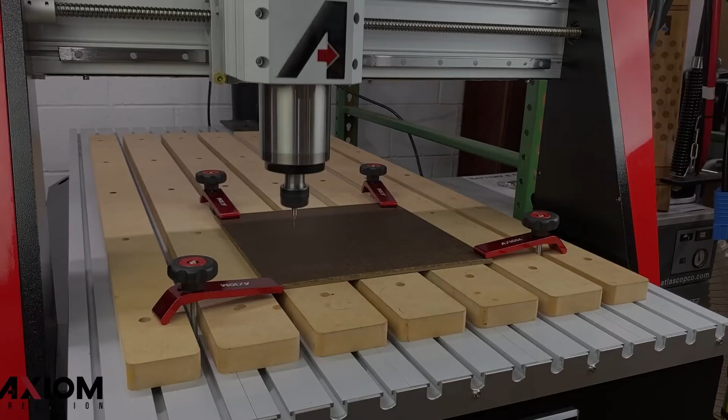And welcome to this collaborative project brought to you by Vectric and our friends over at Axiom Precision. Now, the barbecue season is well and truly underway, so we thought it would be a great idea to provide you with a free project that would make the perfect addition to any barbecue. So let's head straight into the software and we'll take a look at that file.

Okay, so we're going to use VCarve Pro version 11 for this project. Now, before we get started on our session, let's just take a look at a sketch that I've done so we can get a good idea of the parts that we need to create. And so here is a sketch where I thought I'd just show Austin how the part should come together. So let's just talk about this and some of the important things that we need to be aware of. So we have these ends, okay, so we've got one end here, we've got another end at the back, and these two parts basically help hold everything in place.

In terms of the measurements, we're going with 8 inches wide. We're also going to go with it being about 12 inches high, and then the length of it is going to be 15 inches. That way we get a lot of space for your napkins, cutlery, sauces, bottles, that sort of thing. So it's one of those bulky things that you could bring outside, hopefully contain everything in so you're not going in and out.

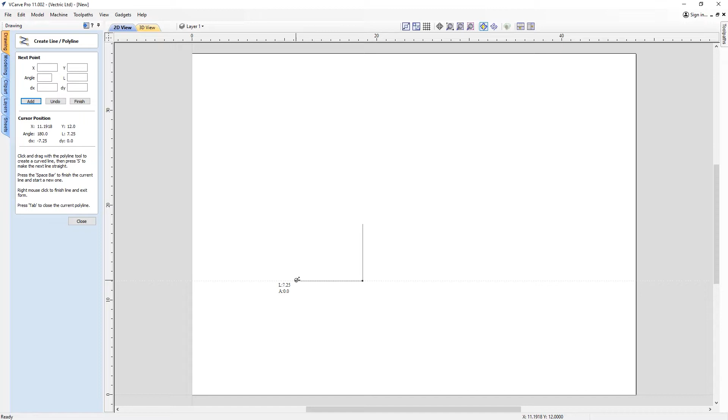So to start, let's use the polyline tool. So I'm just going to snap to the centre of our job. And we're just going to come down by 6 inches. So I'm making use of the smart snap in here just to tell me how long my line is. So we're going to go 8 wide. And we want to go back up to around 6.

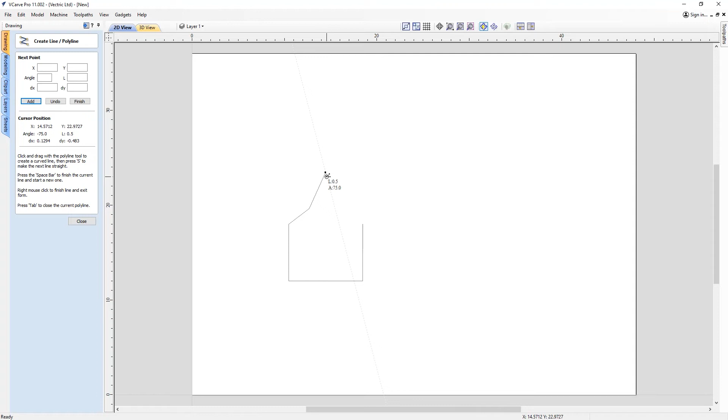And then we want to create this kind of curved shape. So we can do this, try and snap to the centre over here. So if we get the centre line there, and we can bring that up. Okay, so something like that. Maybe the best way to do this would be if we actually undid that. So in version 11 now, we can use the backspace key to undo any movements or positions we've already made.

So we're actually just going to take that straight up, about 7 inches high, and we'll just click that in place. Okay, and then we're just going to take that back over to the right as well, and then just snap that in place. And then we can right click, and now we can create the curvature that we need to create the shape. There's some nice smooth tops here for the actual end panel.

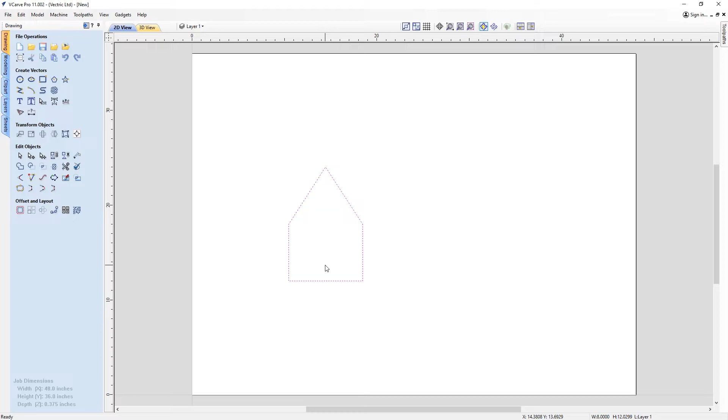So to do that, let's just go into node edit mode, and then we can just smooth this node here, and then we can take these nodes here, all the handles, and then I'm just going to press H on the keyboard to bring up that vertical line, and that way when I move one of these, they both move. So I'm just using the arrow keys to do this, and you can see that as I'm moving it, they're moving in parallel to each other as if we've got this mirror line.

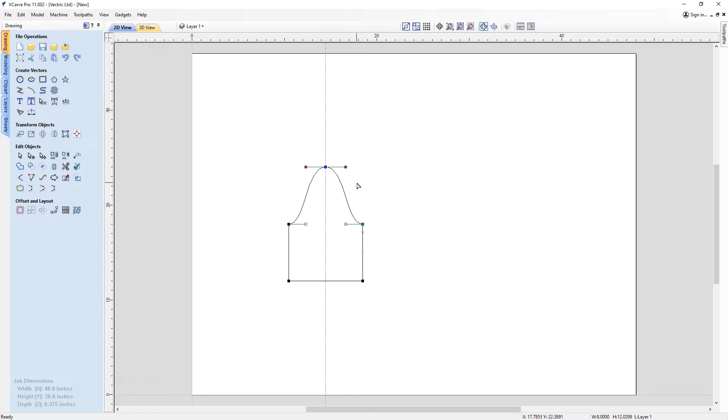Okay, so that's okay. So I want to just take these handles now, so I'm holding down shift to select them both, and I want to just make that a little bit wider, so it's something that looks like this. Then we can just click out, and that doesn't look too bad.

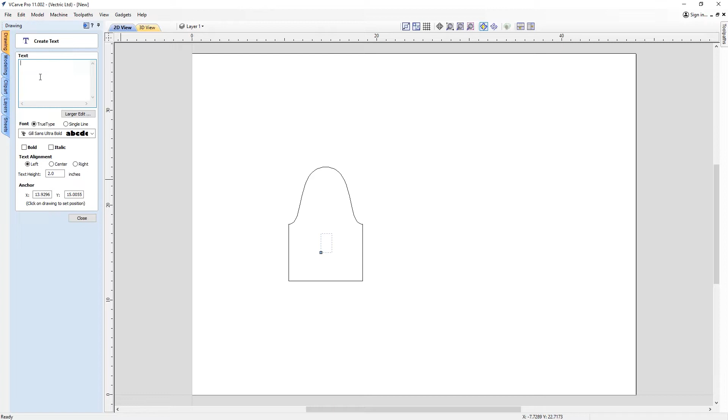Okay, so now we'll put in the barbecue text. So we're going to go into the draw text tool. Okay, so we're just going to position our text here. We're going to go with a font of Gill Sans Ultra Bold. We'll go with a text height of 2 inches, and we're just going to input here barbecue like so. And we can close out, and then we can just position that somewhere around the centre there, just to ensure that we're aligning that up centrally.

We can just align that to the centre like so, in which case we can then just shift that down to take a look at that. Okay, so that's not too bad. We'll just kind of leave that in a position something like that.

Okay, so now I want to give a little bit of detail here. So we're going to go for a decorative motif. Now I've created some vectors prior to this of a crown, so let's just bring those in. So we'll go to File, and we'll go to Import, and we'll import some vectors, and then in the project folder you've got the crown.dxf, and we can open that up.

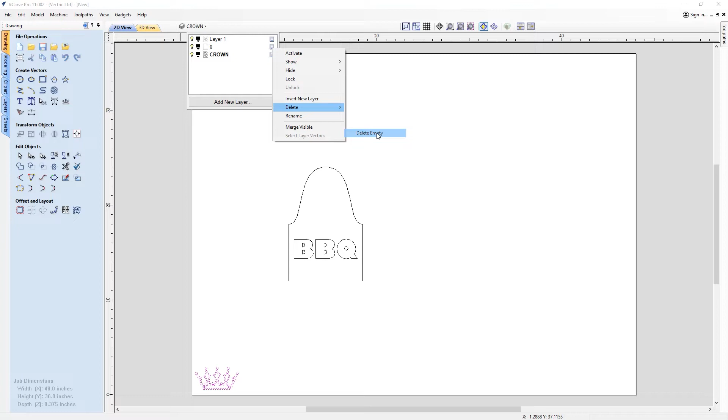Okay, so here is my crown. You can see it's on a layer called crown. You can also see that we've imported in an empty layer as well. So the real nice thing about the software now is, especially if you had multiple layers, we actually have the option here to delete empty layers, and it will just delete all of the empty layers in the list, which can be quite typical when working with imported vector details.

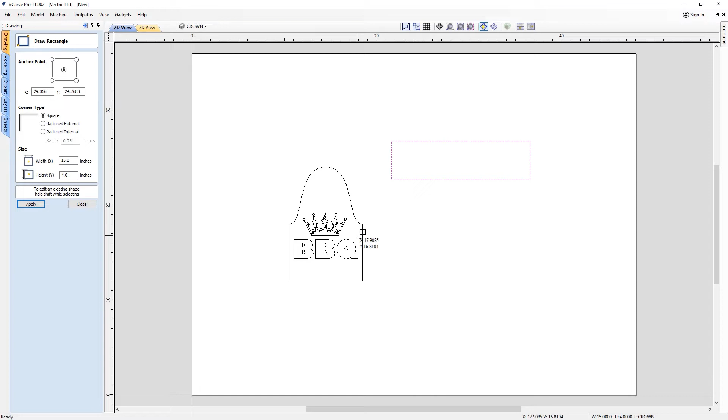So we're just going to position that somewhere like here. Okay, so that's not too bad. So we've got a decorative crown motif, so we've got the barbecue king. So next up, let's go ahead and create a side panel. So we're just going to use the draw rectangle tool in this case. We'll go the width of 15 and a height of 4, and then we'll just go ahead and create it by clicking in position here. Okay, so we're just going to move that somewhere over there.

Okay, so now what we can do is we can take advantage of this space. So this space is perfect to add in any form of personalization. So we could put in somebody's name, we could put in a slogan, you could put your own name in if you're doing it for yourself. You could put some more decoration in there, whatever it is. It's a nice big space for us to use, for us to V-carve. And as we are V-carving into plywood, we might get some of those layers come through just to add a little bit more decoration.

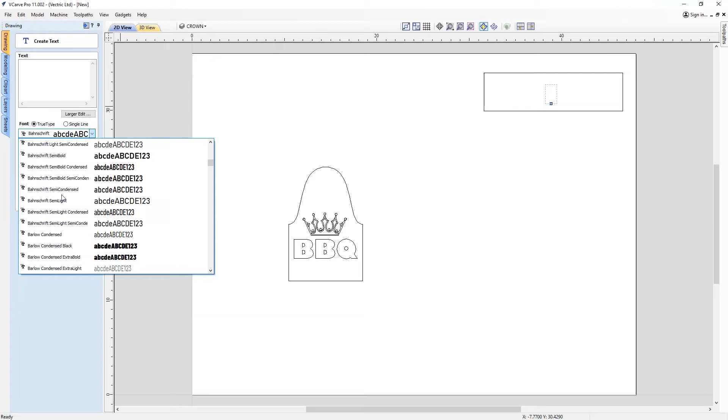So in this case, I'm actually going to put in a slogan. So we're going to go over to the draw text tool. Okay, so here I just want to position my text box. And then what we could do is we could just look at altering the font here. So we'll find the B, so we'll press B on the keyboard. And we're looking for Barlow. So Barlow Condensed is the font that I like. And then we can simply go in there and type in whatever the text is. So in this case, I'm going to go with King of the Grill.

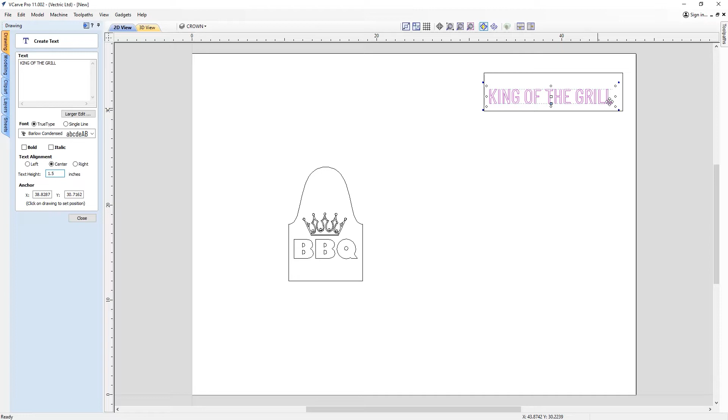Okay, perfect. And you'll notice here, the software's kindly telling me that this is the wrong spelling. And so we can use the spell checker, in which case we can locate the correct words there. And you can see it's done that, which is super handy. I might look at just reducing the font height here to 1.5 so it fits in our space there. Then we can simply close out. Just going to hold down Shift to select the rectangle, and then we'll just go ahead and align it to the center there. Okay, so we've got the King of the Grill in place.

Okay, so we're going to jump ahead now to this stage of the design. So everything else that has been created here has all been drawn up using the rectangle tool. And we're just going to talk about now how everything comes together, what the dimensions mean and what it means to you, before we start assigning our vectors to specific sheets according to the materials that we're going to cut them out of.

So pretty much all of the caddy parts that you can see here, bar the side panel, are going to be machined out of a material that is 3/8 of an inch thick. So we're going to be using the Baltic birch plywood to machine all of these parts. So when working with slot together projects, the thickness of the material is very crucial in terms of the slots that we use to slot parts into one another.

So let's just take a look at the side panel, for instance, or the end panel even. Okay, so here you can see I've got a rectangle here that is 1 inch wide by 3/8 of an inch high. So 3/8 of an inch is that material thickness. And so if you were to machine this, this is something that you would need to change yourself. And we'll talk about the different parts that you need to change later on in this video. But for now, if we're just assuming that this is the material we are using, we'll just go ahead and talk about the rest of the parts.

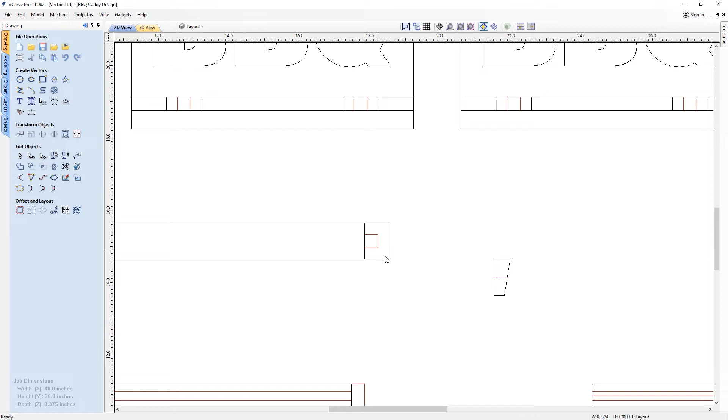And the idea is we're going to create a peg. So over here, I've got this vector, and all I did was I created a rectangle, but then this one node that we've got over here, I just extended that outwards. Then I ensured that the halfway point, which is here, is 3/8 wide, so that at the halfway point it should start to feel some tension as that pushes through the slot, where this portion of the wedge gets larger, and so that shouldn't really go through. So that's just going to lock that into place.

Okay, so looking at these two pieces that we've got here, this one represents the base, this one represents the upper portion that's going to line up in this level here, where we've got a hole cut out here and we've got one here, and this is where we can slot in our bottles, sauces, napkins, that sort of thing, and hopefully it just keeps it all stood upright. So how does this work then? So if we just zoom in a little, we've got this base shape, so the overall base itself is going to be 15 by 8, so that's just a rectangle that I've drawn out.

And then we're going to have the side panel, so this rectangle here represents the side panel, which is this one here or this one here. And the idea is we're going to take this shape, but this shape is going to be extended into this area here, so it slots through. So imagine all the vectors that we can see here as if we're looking down on the piece. It's like a bird's eye point of view. Okay, so we've got the end panels here and here. And then we've got this piece that comes out. It's going to slot through a hole that we're going to have, which is represented by these vectors here and here. Well, these ones on the top.

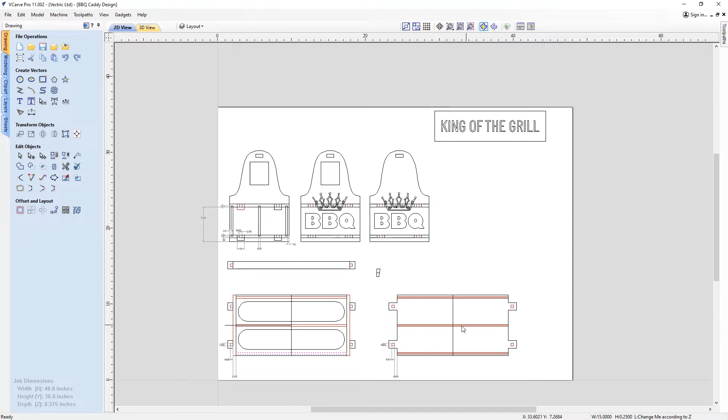So we're going to be looking at using different material here for the side panel. So the side panel is the king of the grill, so we're going to have 2 of those. We're also going to have a plain one that's going to sit in the center reservation here, and that's just going to help us keep compartments separate, so that it doesn't end up a bit of a mess inside of the caddy. Okay, so we're accommodating for that material thickness here, so that is 1/4 of an inch there. And then if we take a look over here, you'll see I've got a side-on view of what we'd expect to see here.

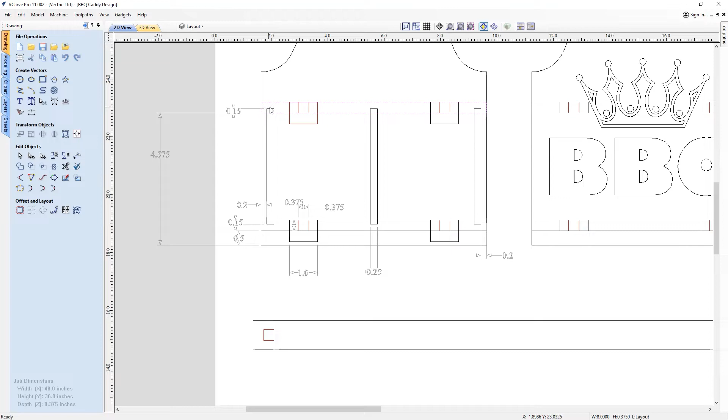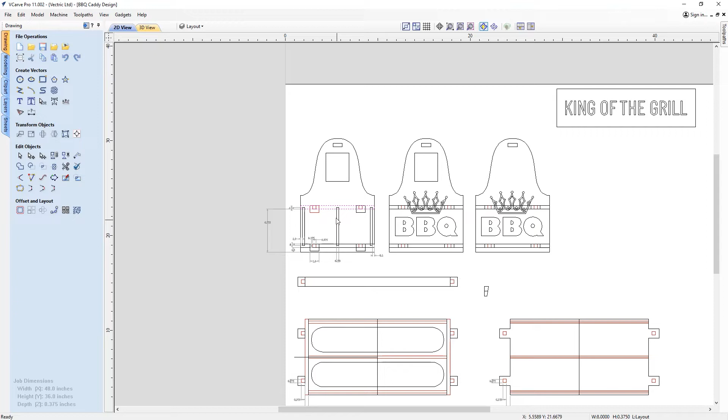So we've got these panels, okay, so they are essentially going to slot into the actual top and the bottom base of the parts only by 0.15. So we're going to be looking at creating a pocket of 0.15 to create these tracks, so then this piece can just slot in nice and easy there. So that's pretty much it.

So in terms of what you need to change, what we'll do is we'll organise all of the vectors into a different sheet, so that you know exactly which vectors you need to alter the layout with. So to do that, we're going to go over to our sheets. Okay, so it's the tab here under the layers tab. At the moment we currently only have one sheet, and I've named this one the layout sheet. As I've opened up the file, I've already named that. So you can alter the name by right clicking and using the rename option to give that a name.

And to add in a new sheet, we can use the add new option. Okay, and then we're going to call this one layout to edit. And we'll just ensure that everything is on there that you know that you need to change according to your material thickness. So we've created that, and you may have noticed that this sheet has been added, and if we just zoom out, you can see it's been added here. And so then we can start copying some of our design over to this sheet over here.

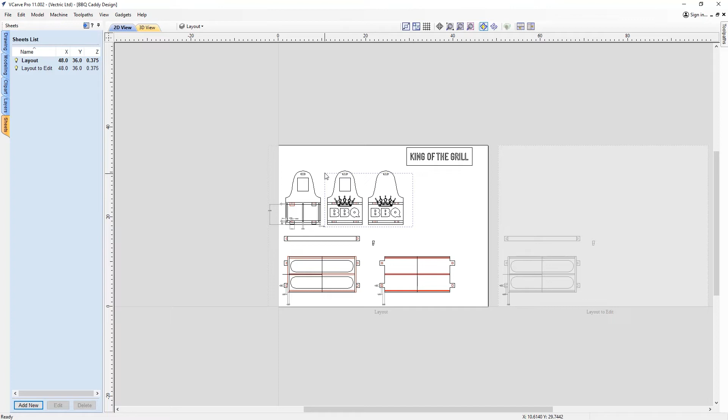So to do that, we're just going to take this one, for example. We're going to right click, and we're going to say copy to sheet, layout to edit. You can see it's copied that over there. We're also going to take the handle and the peg, like so, right click, and then say copy to sheet, layout to edit. And we're going to take these two like so. And actually what we could do is just take one of those as they're identical, and we can then just simply right click it and say copy to sheet, layout to edit, like so.

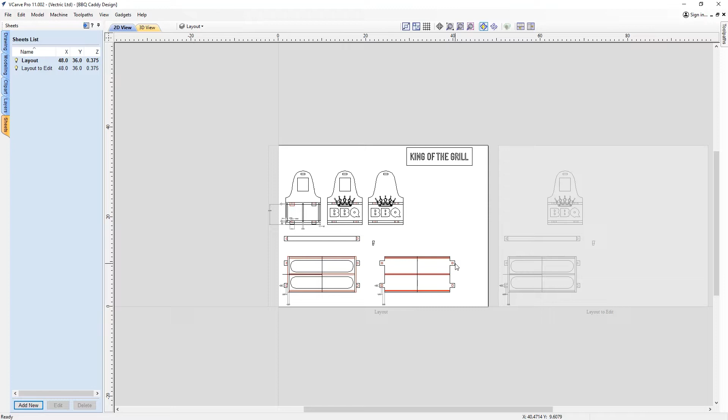Okay, so we can then go over to the layout to edit. To do that, we can double click on the actual sheet itself if we wanted to, and that'll take us to that sheet. Okay, so here we just need to make a few edits. We don't need this vector anymore, so we could just go ahead and delete that. We can also delete this one, and that one. We can delete this one, that one, and this one. And then we could delete this part of the design, that part of the design as well. And then on the bottom here, we can keep that as it is.

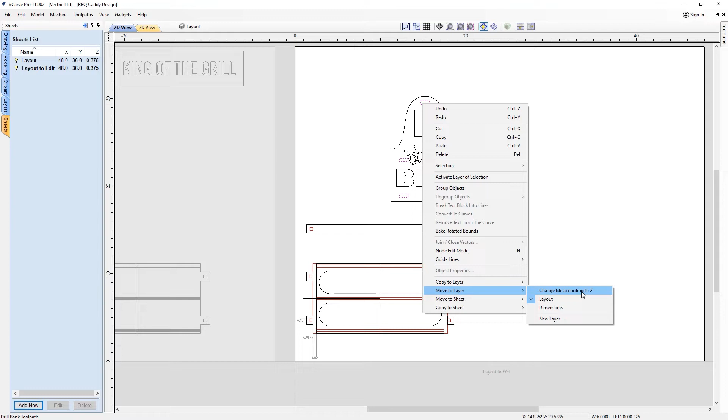And then we're just going to take these vectors here, like so. We're going to right click, and we're going to say move to layer. And we're going to move this one to a layer called change me according to Z. Okay, so this is where you know what you need to change. So everything that is in red is what you need to change according to your material thickness. In which case we can then go ahead and double up what we need.

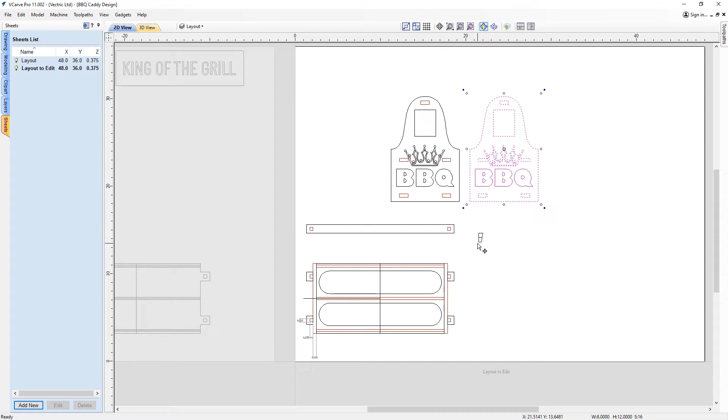So we need another one of these, so we'll just press Control and Alt with that selected, and then we could just go in, delete that one, and then we just need 10 lots of those. So we can go and just create some copies there, like so. So we've got 4, and then here we have 8, and then we could just go ahead and put in 10. So here we have the 10 pegs that we need as well.

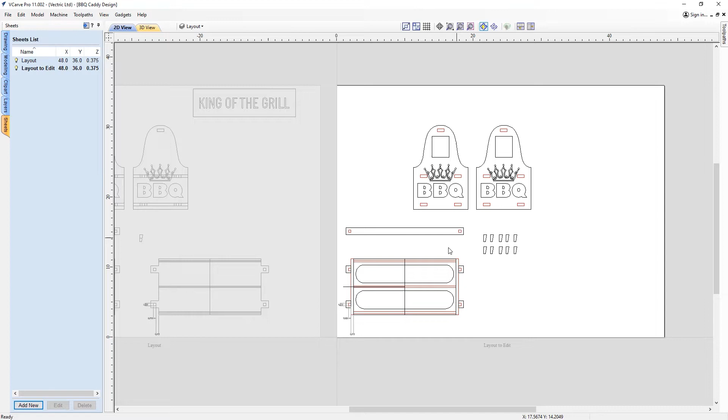So what you need to do is change all of the areas in red according to your material thickness for the overall caddy. You'll notice that I've only copied over one of these, and that's purely because you may as well make edits to this one and then copy that over and then just delete these out, as you do not need them for the bottom piece. Okay, so just going over this panel.

Okay, so what you need to do is you want to make sure your material thickness accommodates the side or the end pieces. So this barbecue piece, that's going to go in there, so you want to make sure that you account for that. Then obviously your peg holes as well, and then the tracks for the grill, or the side panels that we've got there. And that's pretty much it.

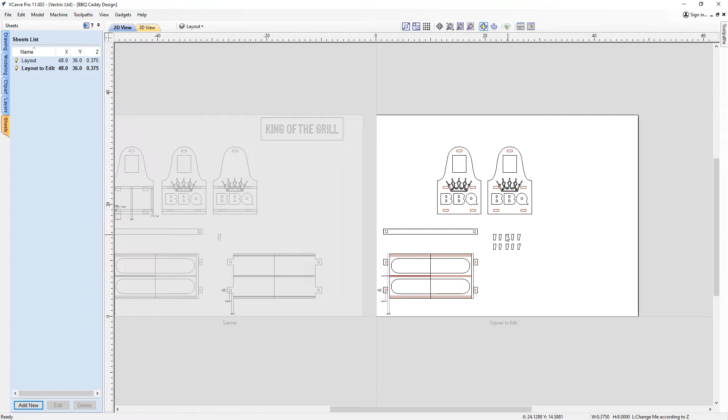You also want to check your pegs as well. So if your material thickness is larger or smaller than the example that we're using, you probably want to alter the peg width as well. So you can just do that by using node edit mode to just decrease or increase the pegs. Okay then, so we'll just press F just to fit that to our screen.

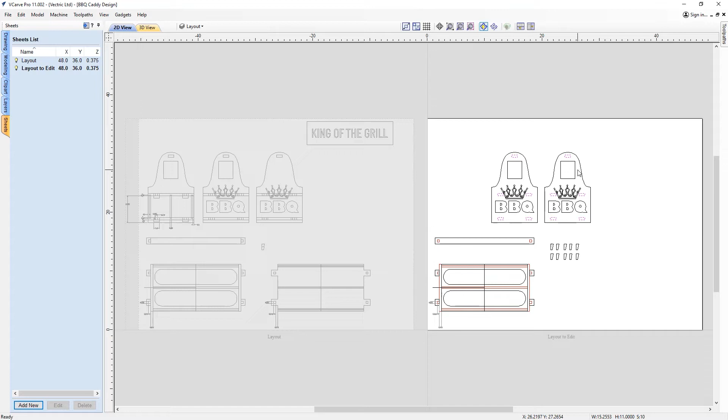So let's say, for instance, the material thickness that you are working with for the overall caddy was 0.3. We've got a nice quick way of changing this. So let's just take all of these slots, for example. So we could take those like so, and then we could go into the drawing tab and we can use the set selected object size tool. Okay, and so here we have the option to scale items individually, and when we click on that, what it does is it scales them on an individual basis as opposed to as a selection, which is perfect for slot together projects just like this one.

So for example, we could say, well, actually we want the width still to remain at 1 inch, so we're going to uncheck link XY, but then I could say, well, actually my material thickness is 0.3, and so we could put 0.3 in there. And then if we go ahead and press apply, you'll see that it changes those and it adjusts those for you, which is perfect. Nice, super quick way of doing that. Alternatively, you can do that by percentage as well. Okay, so we're just going to undo that. So just press undo, take it back to 3/8 of an inch, and then we'll just close out there.

Okay, so now that we know all of the elements that we need to change to work with our material thickness, and we've got pretty much everything drawn out, we can now start thinking about the materials that we're going to use to cut various elements of the caddy itself. So the barbecue text that we've got here, we're actually going to cut that out of a sheet of masonite. So we're going to look at creating a new sheet again.

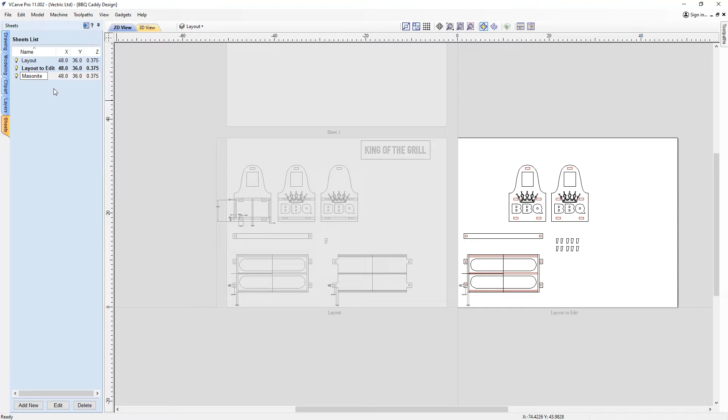So we're going to go over to our Sheets tab here. We're going to use this Add New option. You can see automatically it's created that sheet based on the last set of settings. Okay, so we're just going to call this one Masonite. And then we can come out here. So we can take the masonite and we can use the edit option here, and this is where we can edit the actual sheet size for this particular sheet alone. So here the masonite that we're using is actually 12 inches by 12 inches by 1/8 of an inch, so we can put those values in there.

And then we can specify the Z0 position, the XY datum position according to this particular sheet, in which case I still want the Z0 off the material surface, and I still want the XY 0 position in the lower left hand corner. So you could go ahead and press OK, and you'll see it's now updated that. It's also updated the job size here, and if we zoom out, you can see that compared to the other sheets that we've got in there.

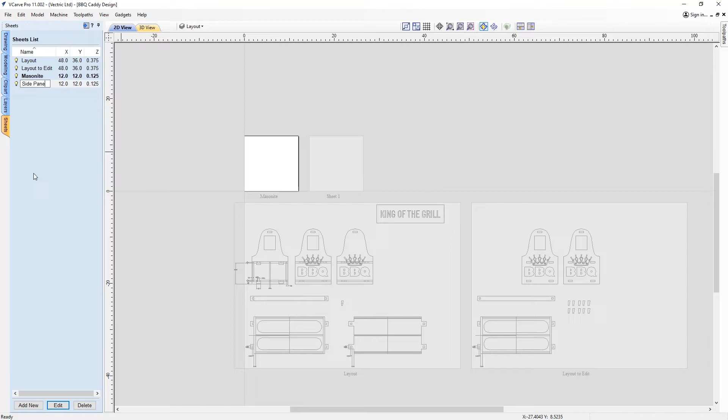Now whilst we're in our sheets list, we may as well add in another sheet. So we're going to add new, and here we're going to call this one side panels, and again, if we just double click on that, that highlights that, but we can go onto the edit option here, and then we can give that the actual dimension. So in this case we are using Baltic birch plywood again, however we're just working with a different material thickness, and so the width is 20, height is 20, except the material thickness this time is actually 1/4 of an inch, and again we'll just go with the same settings here, and we could go ahead and press OK, and again if we zoom out we can see what we've got there.

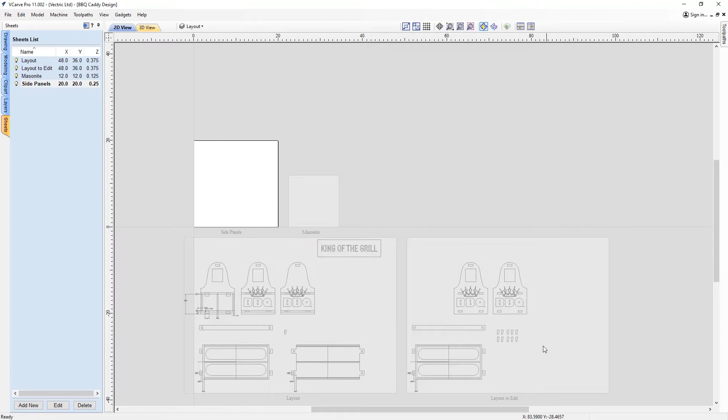Okay, so we've got those two set up already, so I'm happy with that. So then what we can do is we can just double click on our layout to edit. Let's just take this, and we'll take this one as well. We're going to say copy to sheet. We're going to send that to the masonite sheet, and then if we take a look, we can see what it does. So it positions it according to where the original vectors were relative to its 0 position, okay, which is why it's kind of extended out this boundary here.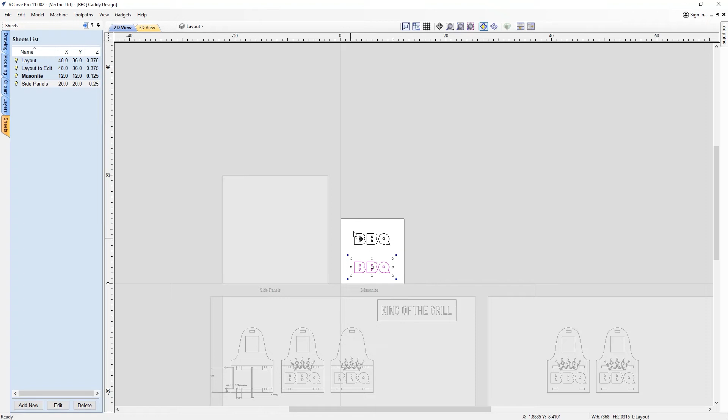So we actually need to put that on our sheet. So if we double click on the masonite, we can then take that, we can move that into position, take this one, move this one into position, and you'll see that boundary is now gone because we're in the confinements of our actual sheet size that we've specified here. And so here we're pretty much ready for us to create an inlay toolpath with the masonite for the barbecue text. Okay, so let's have a look at the side panel.

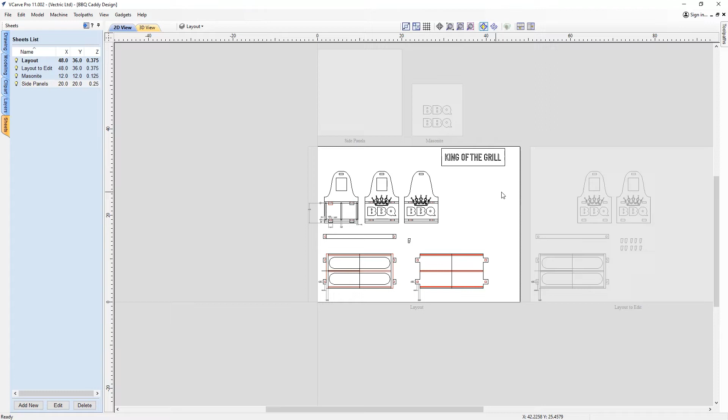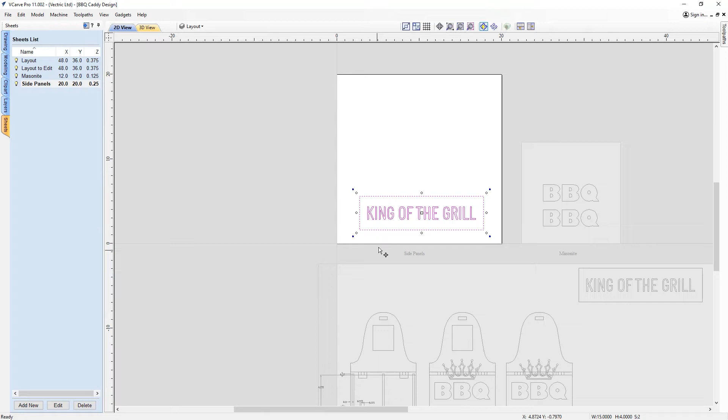So if we just jump back into the layout, and then if we just take that, I'm going to right click, I'm going to say copy to sheet, side panels, and again you can see it's positioned that up there, again relative to exactly where it was previously. So we're just going to take that and we're just going to move that over into position like so, something like that. And then actually I might want to consider looking at spacing out the text a little bit more.

So what we could do is we could take the text and we could go over into the drawing tab where we could look at kerning it or editing the text spacing. And so if we click on that, that enables us to alter the spacing between individual characters. And so we can edit the spacing of the characters on an individual basis between each one of those letters just by clicking, or we could look at editing the spacing of the characters for the actual whole line, which is a much quicker way of doing this. And this is an improvement that we've had for version 11.

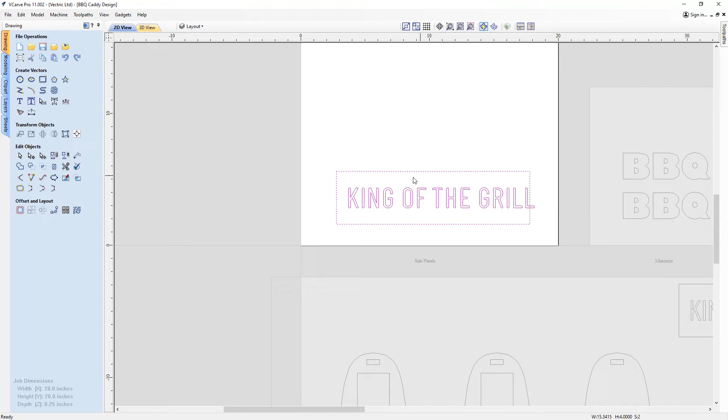And so to do that, we simply press the Alt key followed by the Shift key just to space them outwards, and we can just simply click 1 and 2. I think that's enough space in there, so then we can just come out like so. We're using the normal selection mode. We can take our text, shift and select our side panel, and then we'll just align it to the center there. And so here we have King of the Grill, in which case we just need a copy of that.

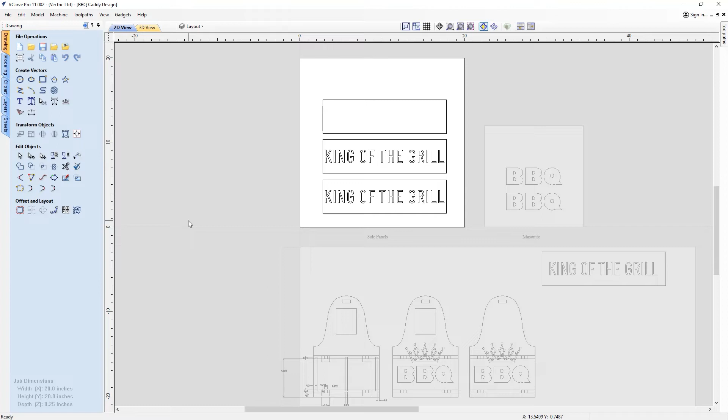So we've got one side panel for one side and one for another, and then we need a third, which is just a plain one that's going to be the divider that's going to sit in the middle of our caddy, which is going to go along these tracks in the middle here. Okay, so moving on again with the design, you can see that I've created a sheet here for the Baltic plywood. And so if we double click on that, we can see what that looks like.

And this is the kind of final design here based on the thickness of our material and all of the parts that we need. And you'll notice that the slots all have these dog bone fillets on. Okay, so that's just to ensure that the round tool can actually get in to those corners. So if you've never used the fillet tool before, that's just accessed here.

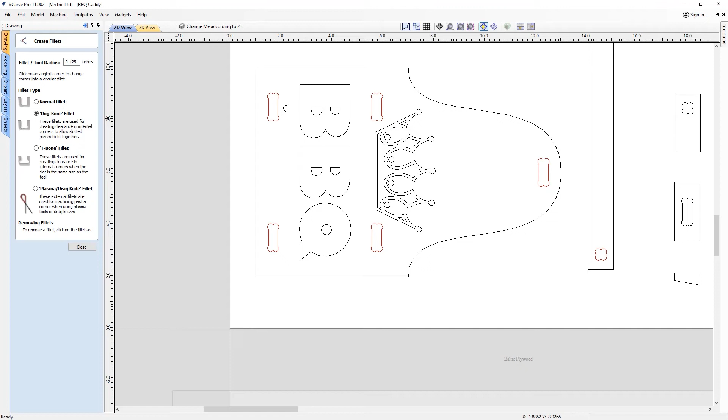So use the fillet tool and then select the radius of the tool that you plan to use, in which case we could say if we're using a 1/4 inch tool to cut something out, we'd put in the radius of 1/8 of an inch. We'd select the dog bone fillet, and then you can simply just click in place on the corners and it will create those fillets for you. So I've left those in red as well, so that you know that you need to alter the fillets there according to your material thickness as well, just as another reminder.

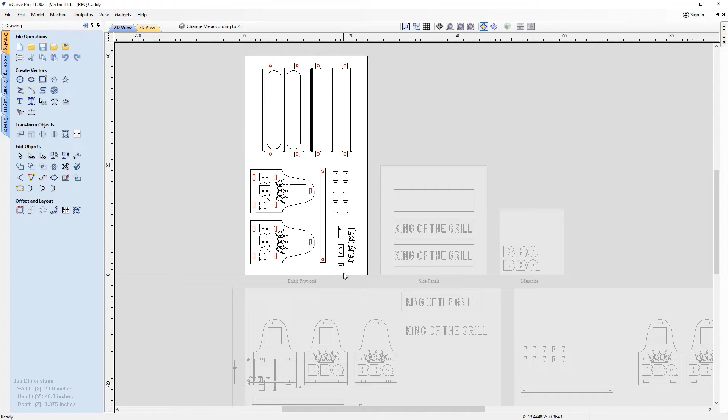Now, if you've watched any of my projects before where we talk about slot together parts, you'll know that I'm an advocate for creating test cuts beforehand. So I've created a little test area here to cut the key elements of the part. So you've got the main slot, which is these slots here. You've got the actual handle or the parts that are going to be coming through the slots to slot into, along with the actual square.

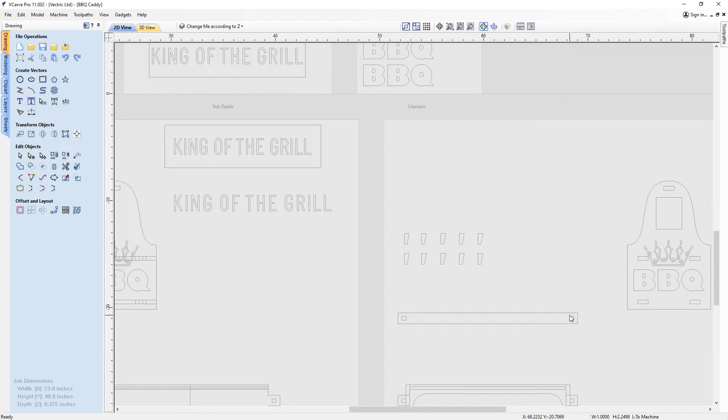So remember these squares here. Those are for your peg holes and a peg as well. So we can then test that this part slots into here and then that peg slots into the actual square as well to kind of lock that in place. So it's always good practice to do that. And once you've done your test, then you can move on to the rest of the elements to cut out.

So at this stage, we're pretty much ready to go and think about our toolpaths. So we've got 3 sheets to machine. We've got the plywood, the side panels, and we've got the masonite.

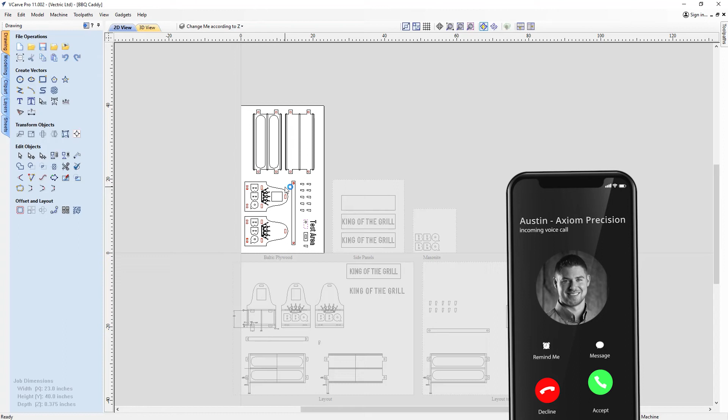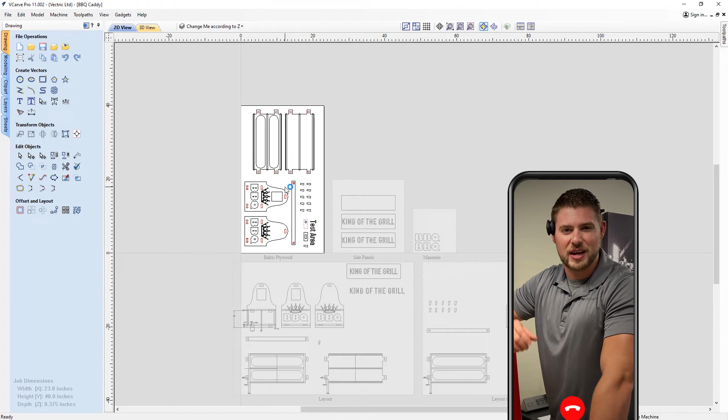Hi Becky, quick tech tip for you. We found that anytime you're working with inlays, it's always a good idea to start by cutting your male portion first. This way, you can cut your female piece out and leave it mounted to the machine. Come back and do a test fit of your pieces. And if you find you need to make any adjustments to the female piece, you can simply go back to the software and make those adjustments. This just helps us ensure we have a nice snug fit of our inlays. Excellent top tip there from Austin.

So let's double click on the masonite and then we can switch over to the toolpaths tab. I've already put the toolpaths in here, so we're just going to quickly go over them. So here we've got the male inlay. You can see that we are on the masonite sheet, so that's pretty handy for us to know about as well. And as always, you should check over your material setup, ensuring that the settings are safe and appropriate for your particular use. In which case, we've got a thickness of 1/8 of an inch. We're setting the XY in the lower left, the Z0 on the material surface, and then we've got various clearance and plunge settings that are safe for our setup. So here we could just go ahead and press cancel.

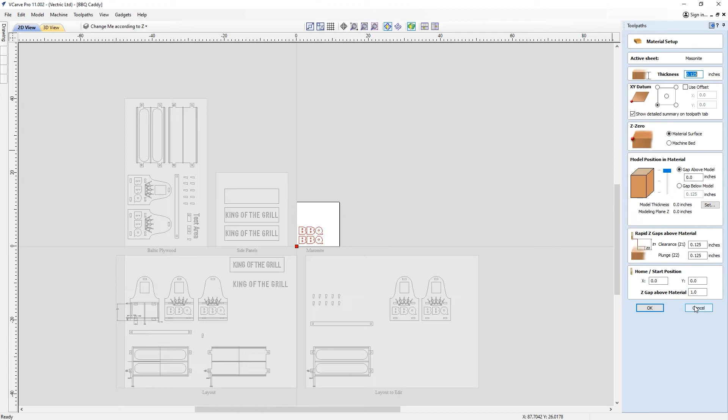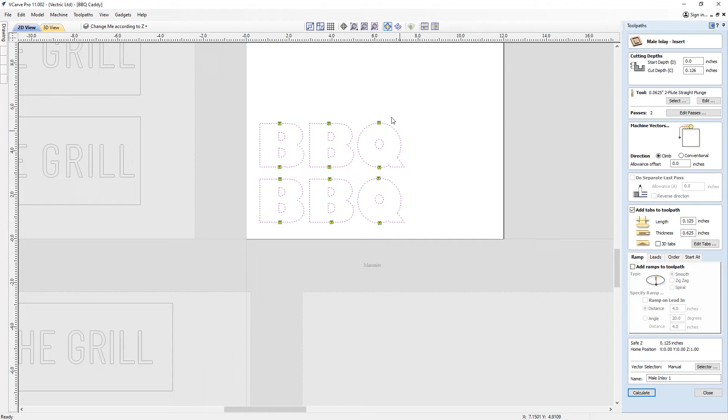So if we double click on the male inlay, let's just zoom in over here. We can take a look at what we've got. So we're doing the male inlay, the insert part here. For the cut depth, we're just going to cut a little bit extra past our material just to ensure that we cut all the way through here. The tool that we are using is a 1/16 inch 2-flute straight plunge bit, and that's going to cut that in two passes. We're also adding tabs to this just to hold everything in place, and then you can simply go ahead and press calculate, but we've already calculated that, so we're just going to go ahead and preview it.

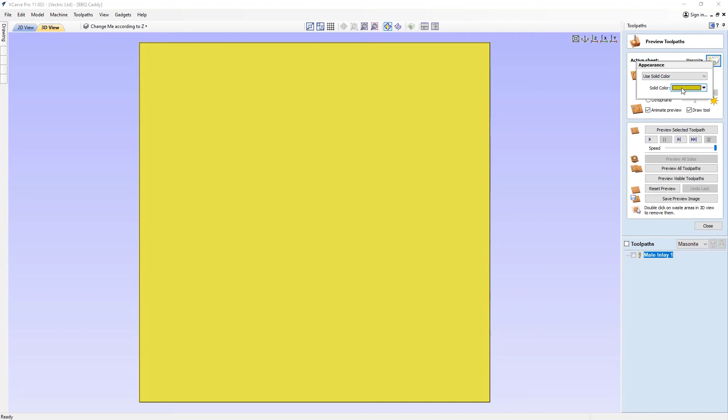So let's just go ahead and pick a material that better represents our masonite. So we could go in here and we could look at using a different material. Now in this case, we're going to just go and pick a solid colour here. So we're going to say use solid colour, and we're just going to go with black. So it's quite a dark colour there. So here we could go ahead and preview that, and that's what that part is going to look like. So we can simply close out there, and that is the masonite done. We'd then go ahead and save our toolpaths and send that over to our machine.

So next up, if we just go to our 2D view, we can now think about the side panels. So let's just double click on the side panels there. You can see as well, we are on the side panels. I can also switch between sheets by using this drop down list. So we've got two toolpaths here. We've got a V-carve toolpath, so we're just V-carving the text there, and the tool we're using there is a 90-degree V-bit, and then we're just using a profile toolpath to actually cut out our parts.

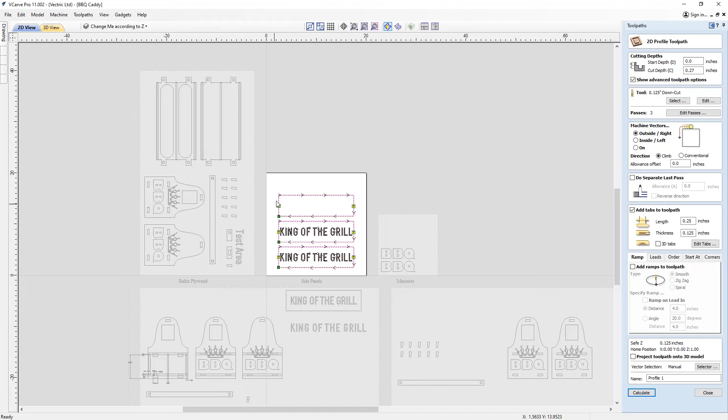And so for the profile toolpath, if we just jump in, we can see we're just cutting down a little bit further, and we're using an 1/8 inch down cut tool where we're going to machine on the outside. We're also going to look at adding in tabs to hold that part in place. And so again, let's go ahead and preview this.

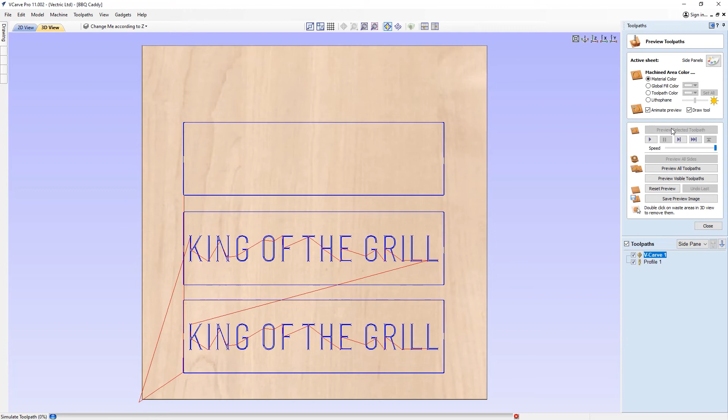Okay, so again, let's just go in here. We're just going to set this to Canadian maple. Okay, so that kind of looks like the plywood that we're using. And then we'll just select the V-carve toolpath first. That's looking good. And then the profile toolpath, we'll preview that, and we can see those there. So it's all good, looks great in the preview. And again, we could simply go ahead and just save those toolpaths out.

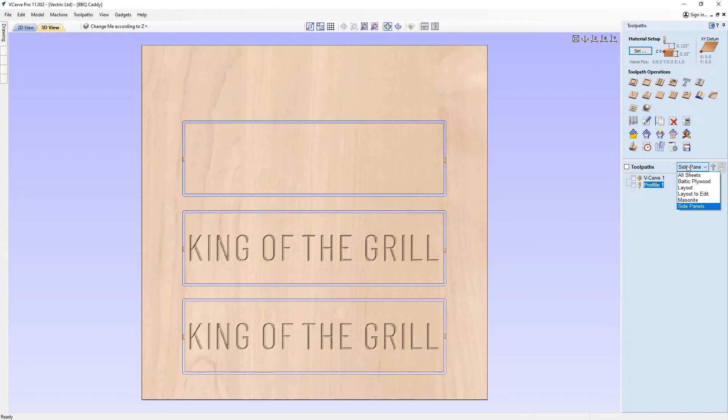Okay, so next up, let's just switch over to our Baltic plywood. Here we can see we've got lots of different toolpaths there. So if we go over to our 2D view, we can see the vectors that we've got here. So let's just run through the toolpath. Here we've got a pocket test with an allowance of -0.02. So let's just double click on that. So we're looking at the test area here.

So you should do your test cuts first just to ensure that the settings that you use for your slots are correct, or they just fit nicely, rather than you just going into the deep end and cutting everything as you think it should be. At least once you've fine-tuned the settings for your test pieces, you know then that everything's going to fit in nicely. So what we're talking about here is this pocket allowance.

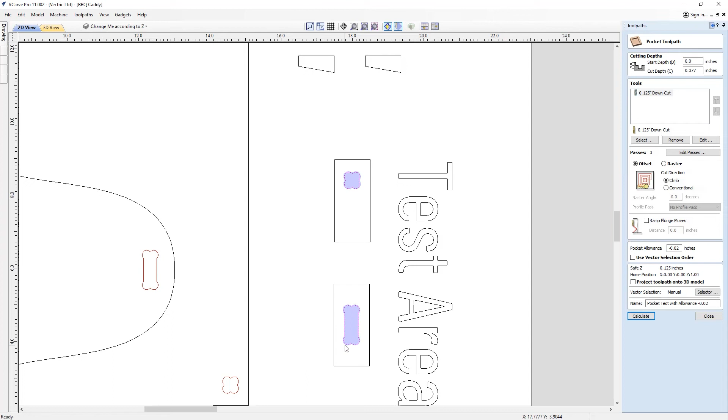So we're just doing a pocket cut here, so we're just cutting through the holes here. We're cutting all the way through the material using an 1/8 inch down cut tool, and we're going with a pocket allowance of -0.02, so it's going to overcut by that amount. So if we just switch to the solid view, you can see how much that is overcutting by, judging by that purple area here. It's going past that vector.

Okay, so if we didn't apply a negative allowance here, then we might find that when the two parts come together, so when this part slots into this slot here, it could be that tight that it actually doesn't even fit together. So that's why we use a negative value here to overcut there. And so that's really the value that we're wanting to test. From past experience, this value's always worked for me.

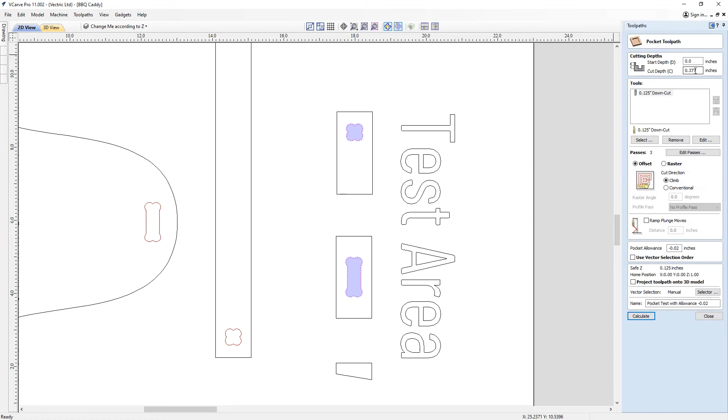However, it all does depend on the material you're using and the tools that you're using as well. So it's always good just to do test cuts and then alter or fine tune this value to a suitable fitness that you find when you cut that out. Okay, so it's just as simple as that. We're cutting down 0.377 with an allowance there. So let's go ahead and preview that.

Okay, so again, let's just change this. We'll just go to the Canadian maple. That's probably the closest that looks like that. So there we can go ahead and preview that. Okay, so that's what that will look like. And then we just go ahead and tile our windows, and we just zoom in over here.

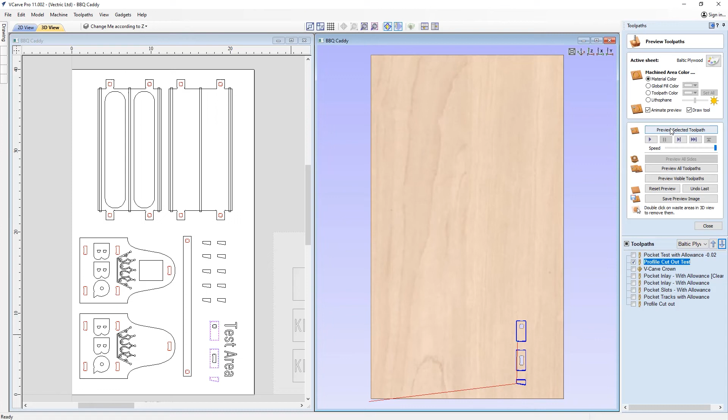So next up, we've got the profile cutout test. So we're actually just cutting all of our test pieces out. So if we just double click to go in there. Okay, so again, same depth, so we're cutting all the way through using that same tool, and that's pretty much it. So we're just going to calculate that. We've got some tabs in there as well, and if we preview that, we can see what that will look like.

And then that's pretty much our test done. So I would go ahead and machine that. Austin's going to do that also, just to ensure that these settings are correct for him. And so once you're happy with your test and the values there, then you can move on to all of the other elements for our BBQ Caddy design. So we can start with the V-carve crown.

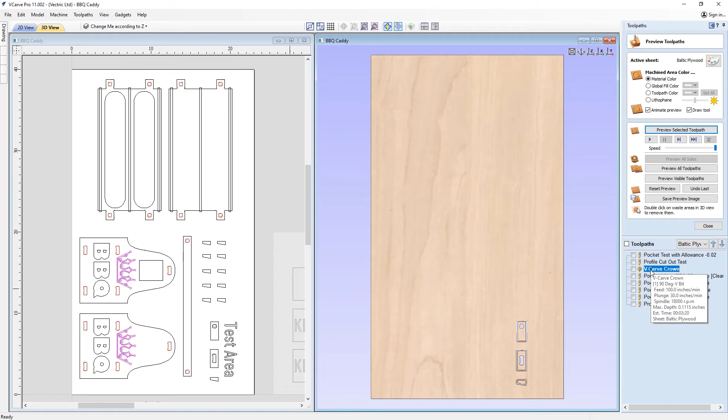So as that's using a V-bit tool, we may as well just get that one out the way. So double click on that. We're using a 90-degree V-bit there. Start depth of 0, where we're going to set that off the material surface, and then that's going to look something like this. Okay, so we're going to just engrave or even V-carve that crown into the wood there, so we can close out.

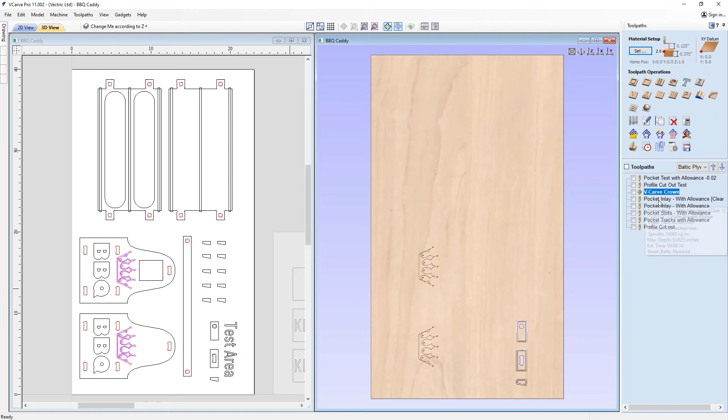Okay, so next up we've got the pocket inlay. We're looking at the barbecue inlay here. So if we double click on that, we can take a look at the settings used here. So we're doing the female inlay, the pocket version for this operation, whereby we're going to use two tools to clear this out. We're going to use a 1/8 inch tool to begin with to clear the majority of our material away, and then we're going to go in afterwards with a smaller tool, the 1/16 inch bit, just to tidy up those areas that the larger tool couldn't quite get into.

And here we're going to go with an allowance, so we're just going to make that a little bit tighter this time because we want this to have a real snug fit. So we're just going to decrease that to -0.01 in this case. And then if we go ahead and preview that, we can preview it. And so once we've cut that, Austin will take the masonite that we've already cut from this sheet here, and he's going to test the fit. And if it's too tight, Austin can come in and edit the allowance here by making it a little bit bigger until it fits in.

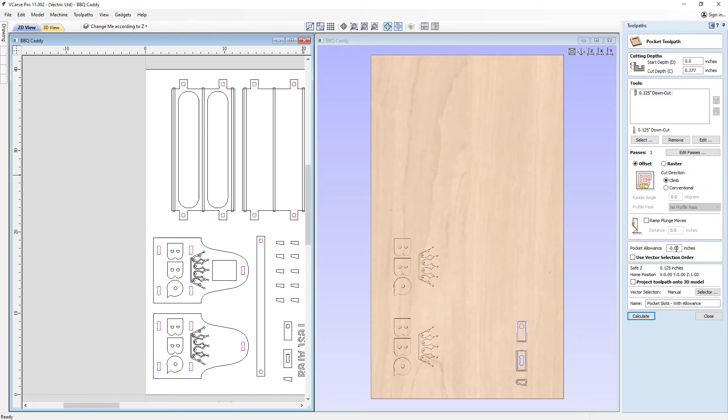So top tip with inlays, already mentioned, always machine the male part first, so that you can then test the fit on the female counterpart. Okay, so assuming that's okay, we can move on to the next set of toolpaths. So we've got the pocket slots, that's all of our slot holes. Again, it's going to be the same as our pocket test, so double click in there. I'm going with those same settings, exactly the same, and then we can simply go ahead and calculate that. And if we go ahead and preview that, that's what that will look like.

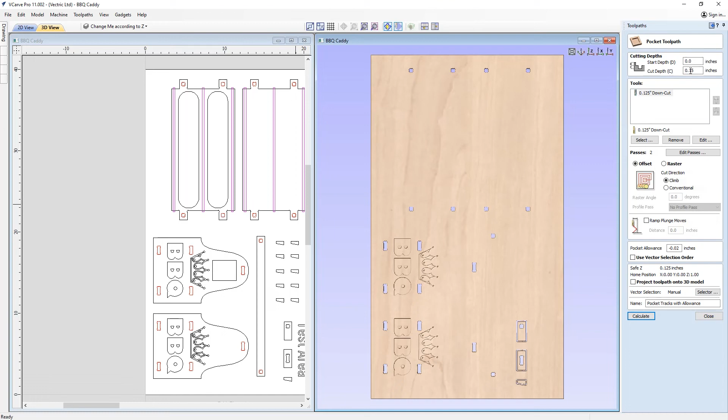And then we've got the tracks as well, so we're doing a different one here. This time we're actually cutting down just 0.15. So going back to the original design, looking at this from a side-on point of view, those side panels are going to slot in here into the top and into the base, and we want them to go in 0.15. So we've measured that there and we've measured that there. That's why we're cutting down 0.15 here, so it fits nice and snug. Again, we've got an allowance there, so we'll just close out and go ahead and preview that, and we can take a look.

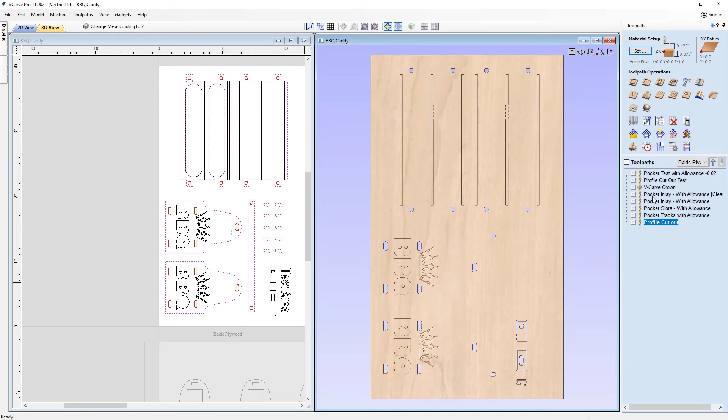And then the last toolpath is the profile cutout. So going back to our sheet with that selected, you can see it's all of the outlines there. And if we double click on that, it's the same settings we used for our test, assuming that's correct as well. Then you can just check over everything. We've got tabs in there as well. We're using the 1/8 inch tool to cut that down, and then we can calculate that, close out, and preview that toolpath to see what it looks like. And so there are all of our finished parts for the Baltic birch sheets.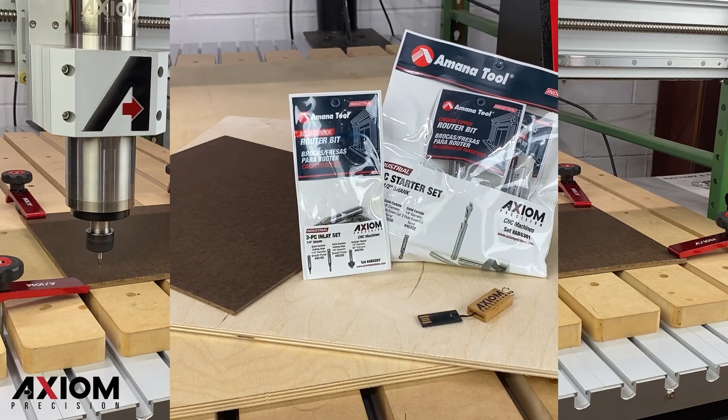And so at this stage, we could then save out those toolpaths and hand everything over to Austin at Axiom. Today we'll be using our AR8 Elite along with an Axiom 3-piece inlay set and our 2-piece starter set. We have our Baltic birch and masonite already cut to size and ready to be mounted to the machine. If you have an Axiom, remember, before getting started, it's always important to make sure your machine is homed.

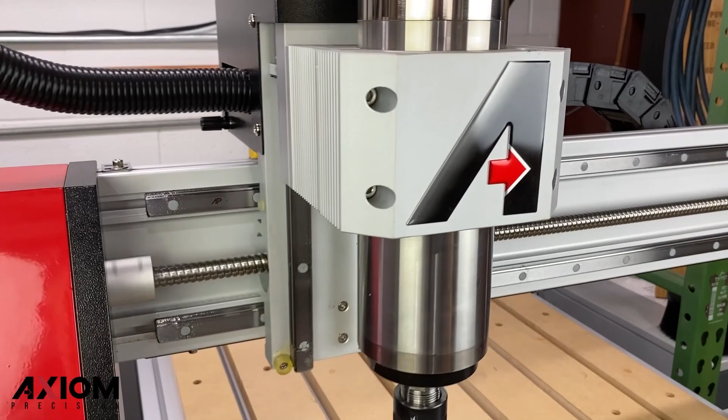We're going to get started by cutting out our male letters for the inlay. This will be out of our masonite. After we have secured our material down, we can then thread off the collet nut and be sure our 1/4 inch collet is inserted. Remember, the collet should snap into the collet nut. The first bit that we will be using is the 1/16 inch straight bit from our inlay set.

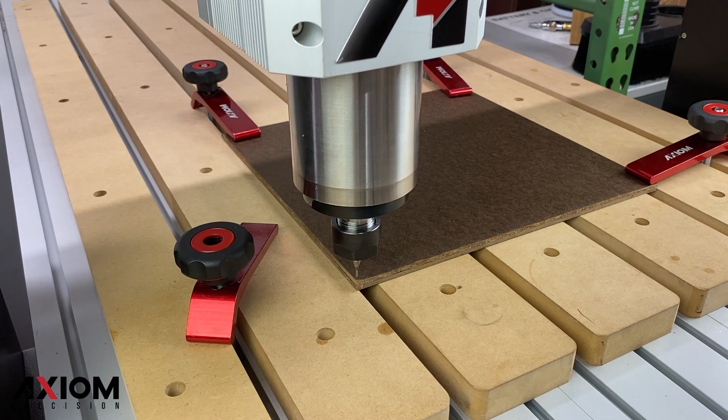After locking our bit in place, we can jog the machine to the lower left-hand corner and set our origin position. Once the bit is in position, we can press the XY0 button on the controller. This will allow us to set that origin location.

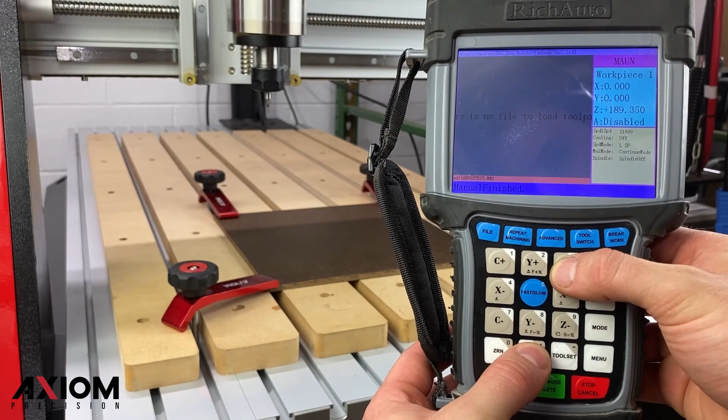On the Elite series machines, the spindle RPM will be displayed on your controller. Pressing the spindle button and the Z plus or minus buttons at the same time will allow you to change the RPM. For this bit, we will be setting our RPM at 24,000.

After our flash drive has been inserted, press the File button on the controller. Once it loads, you can select from either the internal memory or the flash drive. Scrolling down to our folder labeled Masonite, we can press the OK button to select our file. After the file has loaded, the B58 controller will display the selected toolpath.

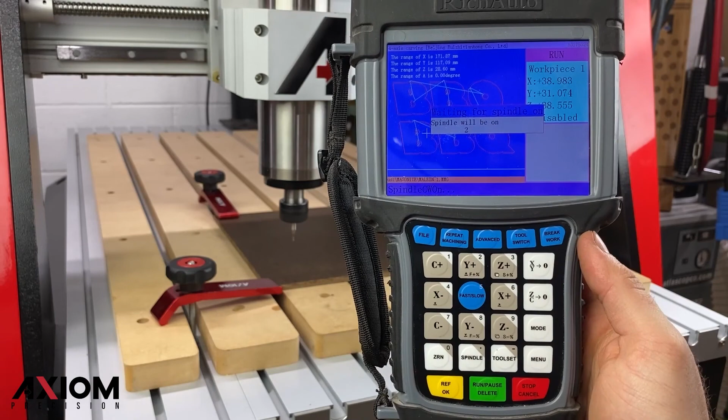When you're ready to run your file, press the Run Pause Delete button on the controller. The work parameters screen will be displayed, and then pressing the OK button on the controller will display a 4-second countdown as your spindle fires up to operating RPM.

Now that our letters are done, we can clamp down our 3/8 Baltic to our table. With our 1/16 inch straight bit still inserted in the machine, we can use it to set our origin in the lower left-hand corner. Again, pressing the XY0 button on the controller will allow us to set that as the new origin position.

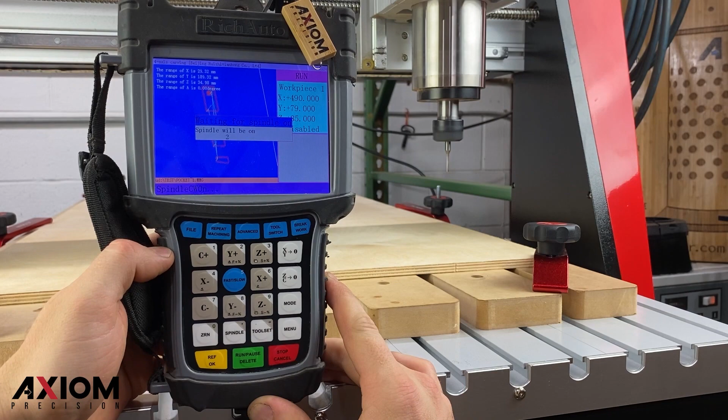Switching over to our 1/8 inch end mill from the starter set, we will be using this bit to cut out our test piece. Cutting a test piece will allow us to check our clearances and make sure we don't need to make any changes in the software before continuing. So with a quick sand of our test pieces, we can check the fitment, and everything looks like it's going to work just fine.

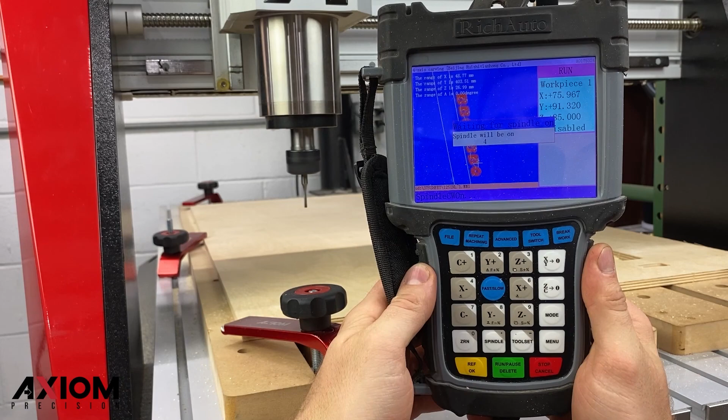With our 1/8 inch bit still in the spindle, we're going to use it to cut out our larger clearing path for our female inlay. While this file is running, it's a good time to clean up your male letters and prep them for your test fit. Remember, when doing an inlay, it's always important to cut the male letters first. This will give you the ability to test fit your pieces while the female piece is still mounted on your machine.

Switching back to our 1/16 inch straight bit, we will run the finishing pass for our female pocket. This will give us those nice tight corners and our offset. So with everything looking good for our test fit, we can now switch over to a 90-degree V bit and engrave our crown. Be sure to always touch off between bit changes.

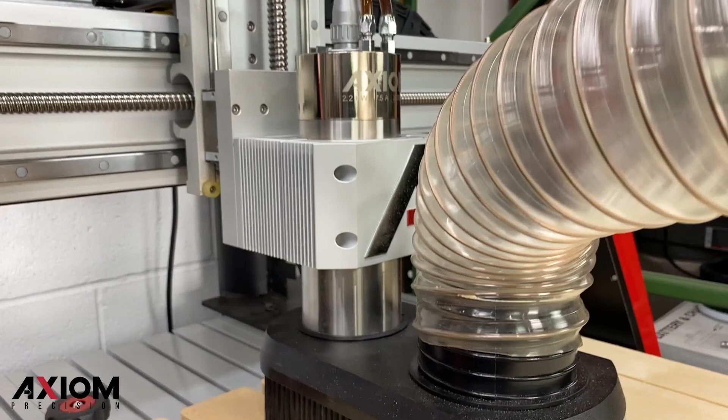With one last bit change for this piece, we'll switch back over to our 1/8 inch end mill. We will attach our dust shoe and run our last file. This bit will be used for cutting out all of the pockets and all of our profiles. With this piece now finished, we can remove it from our machine and mount our 1/4 inch Baltic to the table. Once our origins have been set in the lower left-hand corner, we can perform our V-carving and our profile cut.

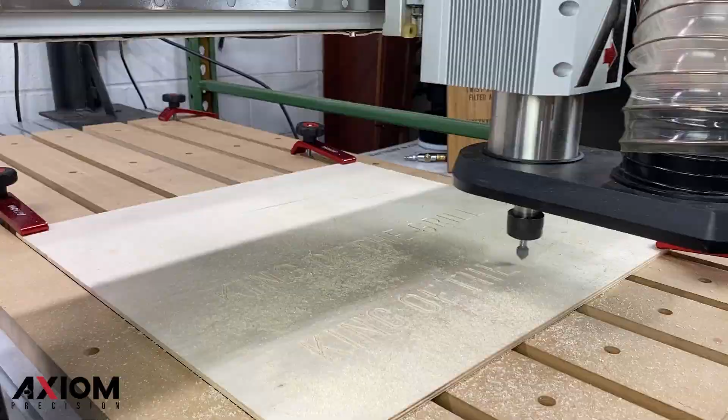With everything cut out and sanded, we can now glue our inlay in place. Now that everything has been finished, we can assemble our grill caddy and use our pins to lock it all in place.

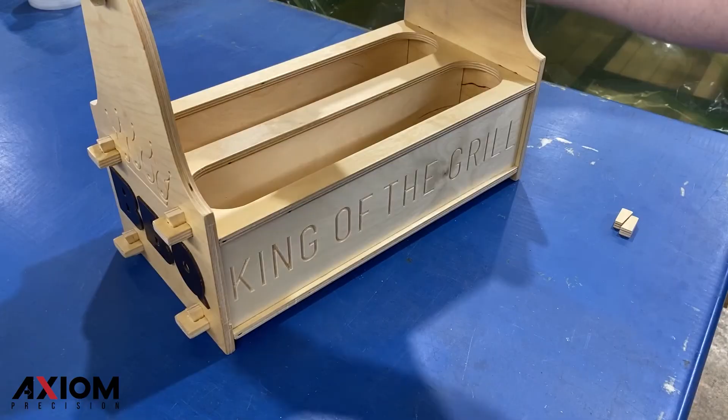Well, Austin, that looked like it turned out great.